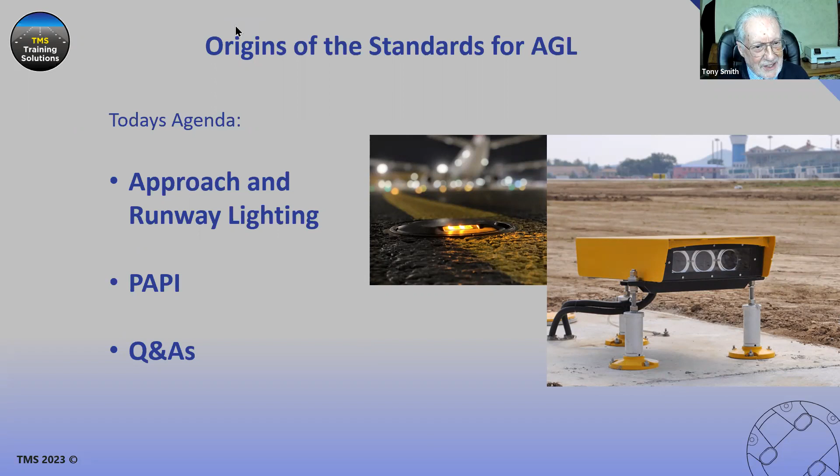Right. Well, from the very early days of flying, there was a concern and a need. Pilots, of course, initially the very first flights were in good visibility daytime conditions only. It wasn't long before people said, we'd like to be able to fly at night, but we can't see enough to be able to do that.

And to put it in a word, there was a hope, shall we say, between about 1910 and 1940, that somehow some lighting could be devised that would turn night into day, so that pilots could do what they did at night in the same way that they controlled the airplanes by the day.

And so we see here stories of examples of, for example, there's a story that when Lindbergh was arriving in Paris, having flown the Atlantic, enthusiasts went out to the landing strip with their car headlights and shone them on the grass to give him some visual cues to land by.

There were, at that time, of course, before the 1940s, effectively no runways. You had an airfield with grass, and the direction you landed in depended on various things, including the wind direction and other things. And so it wasn't until you got really into the 1940s before we started to see major fixed installations.

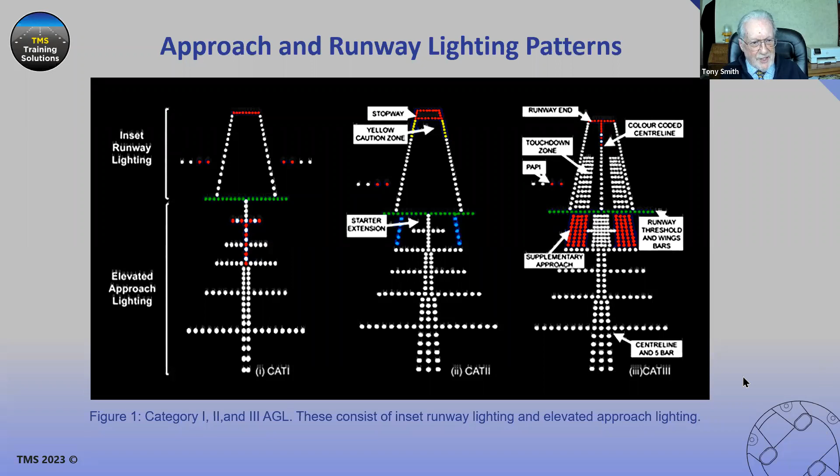And if we go to the next slide, please. No, you've gone too. We're going to go. That's that one.

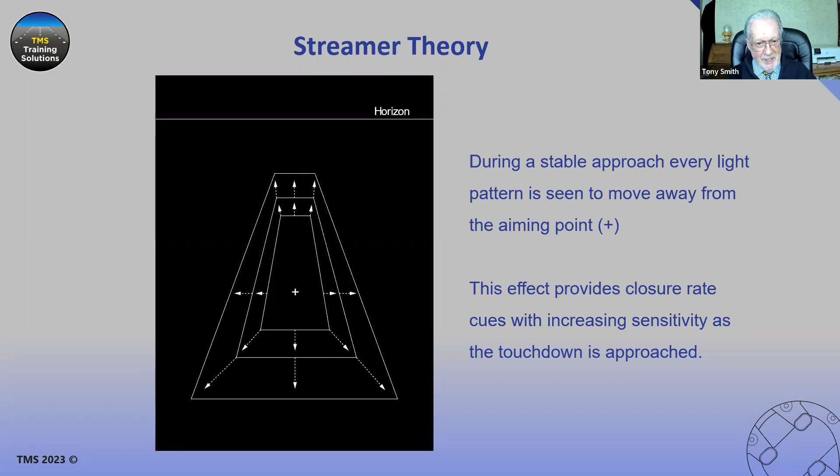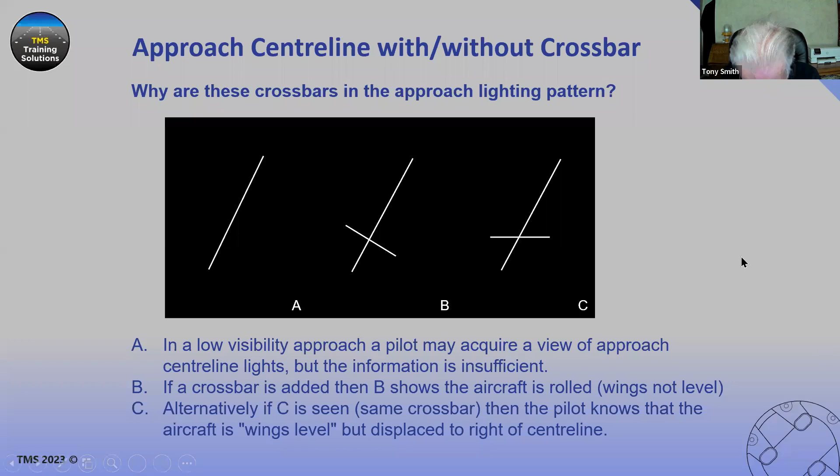Essentially, there will be small differences, it's inevitable, but essentially, wherever you are, as long as you've been delivered within that envelope, you should get the same cues. And as you maneuver within it, you should retain the same cues. The lighting, in other words, once you've acquired lighting, it should always be there as you continue the approach.

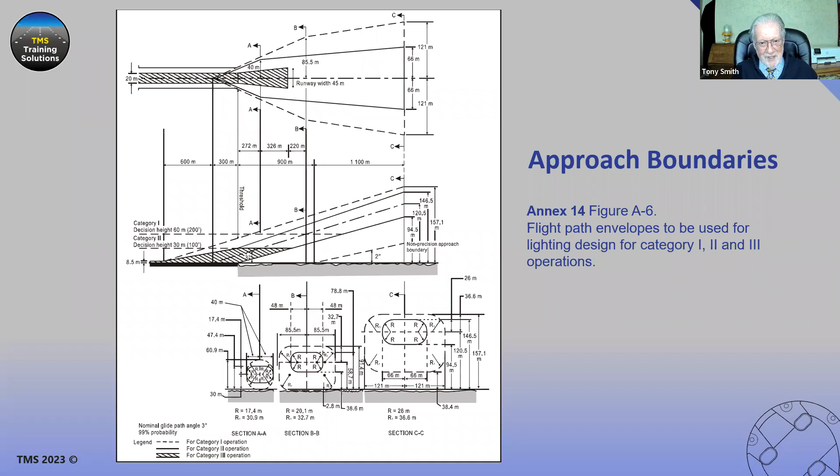And one mustn't forget takeoff. Takeoffs can sometimes take place at runways where the approach guidance doesn't allow landings to be as low visibility as takeoff. Takeoff can be the design case in some situations as to how much of the lighting that is required by Annex 14 you provide. When you provide a centre line, for example, your design case can be the takeoff case. The visibilities may be lower than anything you're using for landing.

As I say, there's the need for the enhancement of touchdown cues in other than category 1 and better visibilities. Those textural cues are important for well-controlled flares and landings. As I already said, the lighting must be designed so that the visual segment, once you've acquired it, does not decrease. And that can generally be achieved if the fog is from ground up to a fog top.

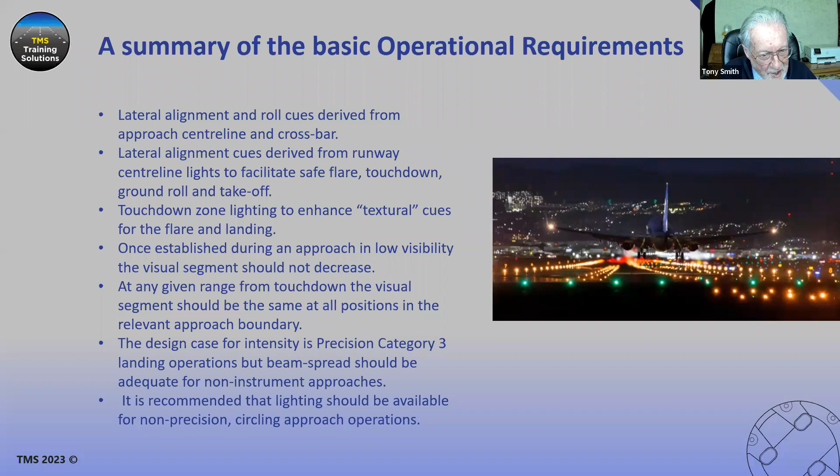So let's leave lighting with, as I say, a lot of things we couldn't address, but let's just go on to PAPI for a little while. As I say, we've had quite a lot of stuff on that in previous webinars, but just for a few minutes, just to look at PAPI to say, why do you need a visual glide slope indicator?

Well, one very basic thing is if you want good landings, then you have to have a stable approach. The aircraft should come to the runway in a very stable situation, both in its rate of descent and in the direction in which it's pointing. Of course, you have things like crosswinds and so on to contend with. Basically, a stable approach is your best hope, both for a good landing in terms of where you land along the runway, but in terms of safety. Safety is built in if you stabilize the final approach.

But unfortunately, there aren't any precise alignment cues in the vertical plane so that you fly an accurate and stable approach. You need height and height rate information, in other words, changes in vertical position, to be able to do this. And it just comes to mind, I did a trial once where it was actually helicopter flying. It doesn't matter very much.

They were flying non-precision approaches to a runway, and in the approach there was a manufacturing facility, and the facility bought a crane with a very long jib, which was sticking up into the approach area, and the owner refused to put a red light on it because he said it wasn't a fixed object, it was moving, and there was a bit of a standoff with CAA. And so one thing I was asked to do was go and look and see, well, what clearances were there actually with these visual approaches with the pilots.

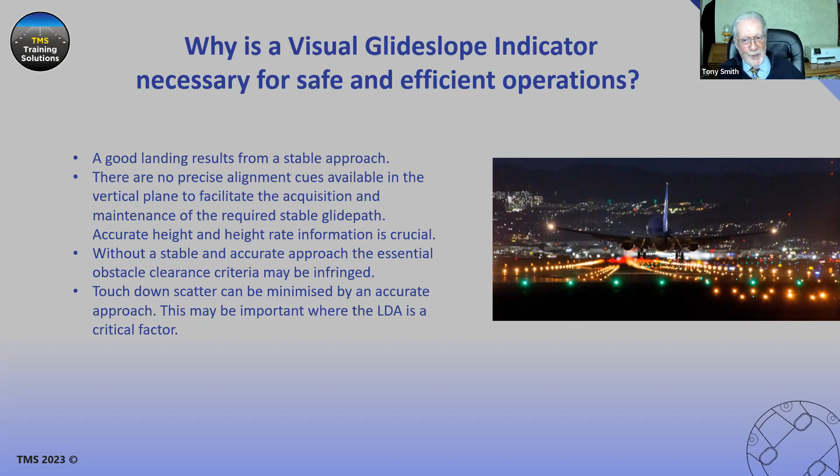It is important to have, and even if you've got ILS on a runway, there should be a PAPI, I maintain, because I've seen accident reports when the ILS hasn't been working because it's in maintenance or something, and there have been accidents, people landing well short of the runway, hitting obstacles because they've got no vertical guidance on a manual approach. A PAPI, I maintain, would have prevented that accident. Those are the basics of why we need a glide slope indicator. We could add more, but those will do for now. Now, this is how PAPI looks.

This is a diagram from my original report published around the late 70s. At that time, we were looking at having PAPI on both sides of the runway. One of the reasons was because we were replacing VASI, and VASI was on both sides of the runway. And some pilots felt that that was essential, that you had it on both sides. But very largely we'd drop the requirement.

Usually it's now on the left-hand side. It can be on the right-hand side, just so you get the same information. You've got duplicative information there, as you see. But there you are. There are 5 states: very high, slightly high, on slope, slightly low, and very low.

Now, I had a very interesting discussion. I mentioned Calvert and his involvement in the early days and development of VASI. The VASI was developed in the 1940s, and it was the form it was because it didn't use any lenses, and there was a great concern about contamination of lenses.

And at that time, there didn't seem to be a technology to say, well, we can actually have what we want with lenses. So it was without lenses, which meant, in fact, you finished up with a pink zone as you went through, looking through the slit as you went from red to white. That pink zone actually was not very useful. It varied in extent depending on whether it was day or night, how much sunlight there was in the atmosphere, if you like.

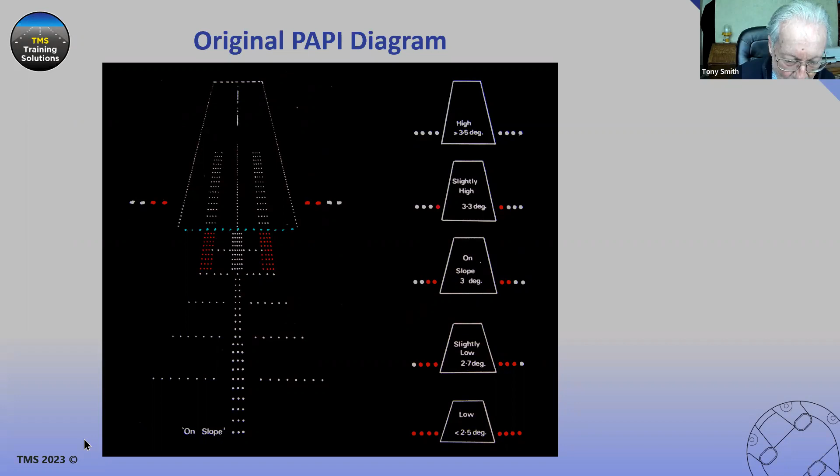And I think there is one more slide to look at. Yeah, this, just to remind you, you find it in Annex 14, the 4 sectors, originally 2 degrees 30, 2 50, 3 10, 3 30. Those lines define a line in space which must be precisely set up. It must be at that angle to a very tight tolerance, 1 or 2 minutes. You should aim to be able to do it within a minute of arc, but certainly ICAO does say 3 minutes. But that isn't the design aim.

The design aim is to have it as close to the ideal as possible, and the colour should change from red to white in less than 3 minutes of arc. That's the limit. But from my experience, with our basic original equipment, we managed to achieve with quite a basic design 1 to 1.5 minutes of arc. It's achievable. And if you are responsible for procuring equipment, ask the manufacturer to set up a trial where you can actually view the PAPI you're proposing to buy from a range of at least 1 kilometre and see that you can get this complete change from one regime to the other well within 3 minutes of arc.

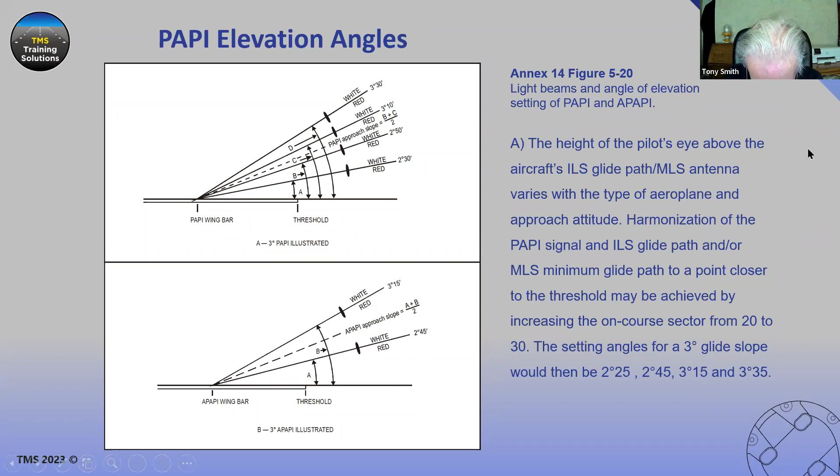As I say, we've talked about PAPI, a lot of the details about where you put it and other things, and there isn't time to go into that today. So I've spent most of my time on the approach and runway lighting because I haven't really addressed that before. The PAPI is just a bit of an update and a refresher. But there we are, and I think that's probably a good place for me to stop, bearing in mind we have been going for an hour, except to say here is a good example of what the lighting does for you.

That would probably be a very safe landing, but you need to beware if you make a decision above a fog top. And with that, I will stop. I think I've gone on too long, probably, but a lot to cover.

And start video. Thank you for that, Tony. Absolutely fascinating insight into the origins of the standards as they apply to the approach lighting, the runway lighting, and of course the PAPI, which you inspired. So that's really interesting. We've got a number of questions here, probably too many to answer just at this moment, but I will just look through here. Just looking.